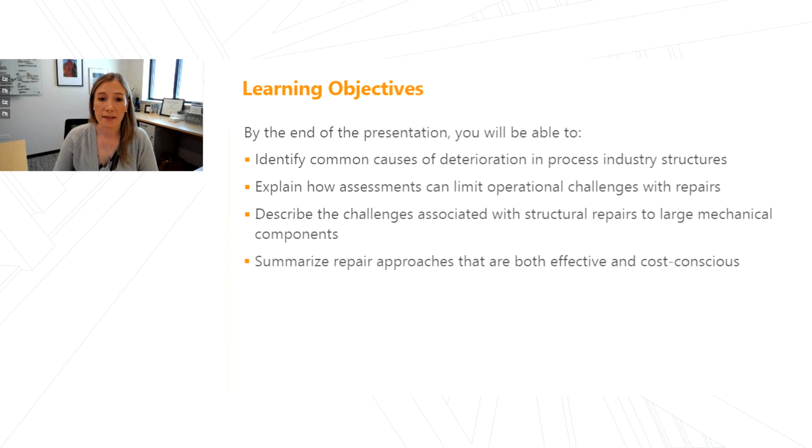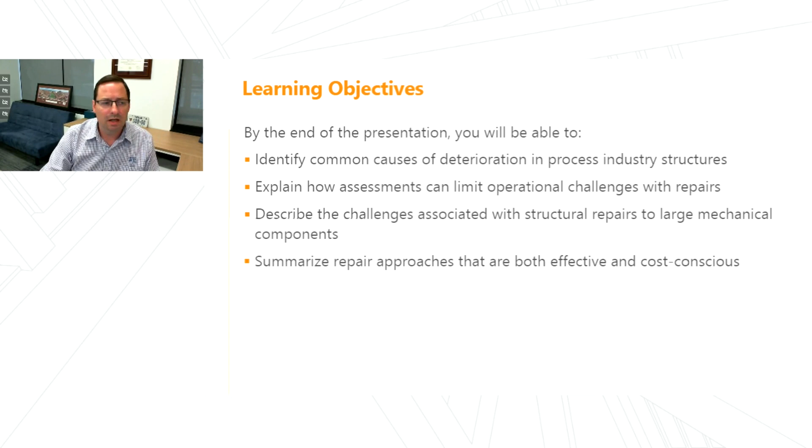Thank you, Liz. Well, let's get started. Our learning objectives today, for those of you in the AIA group, are going to be to identify some of the common causes of deterioration that we see in process industry structures, explain how assessments can limit some of the operational challenges that we see with repairs, describe those challenges associated with those repairs, and then summarize the kind of approaches that we can use to be both effective and cost conscious.

So to do that, we're going to go through a short summary list of the common causes of deterioration that we see in these things, some of the challenges that we see in making these repairs. We've got a couple of case studies that my colleague Katelyn will take us through, and then toward the end we'll discuss some of the proactive and reactive strategies that you might want to employ looking after these structures.

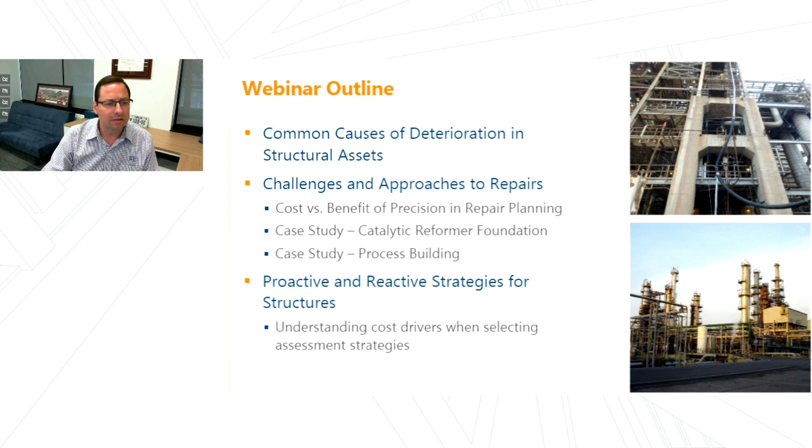So we wanted to start with discussing a term that might be new to some members of our audience. Within WJE, we have several different civil infrastructure initiatives, and the term process industries is a term that we use internally as kind of a catch-all term to describe the refinery, chemical, petrochemical, liquids and gas terminals—really anything whose job is to move fluids around and maybe convert them from one thing to another.

And we recognize that the needs of these industries are somewhat different from, say, the nuclear industry, municipal wastewater, and the like. And so specialists like Katelyn and I tend to focus on these practice areas that are a little more chemical or refining industrial.

But whether that's true of you or not, regardless of where we practice, it's sometimes easy for us to focus on whatever assets are in our task list. I certainly do that, looking at pressure equipment and piping quite a bit more than structures. But that means a lot of us tend to forget about items outside our scope—things you walk past every day.

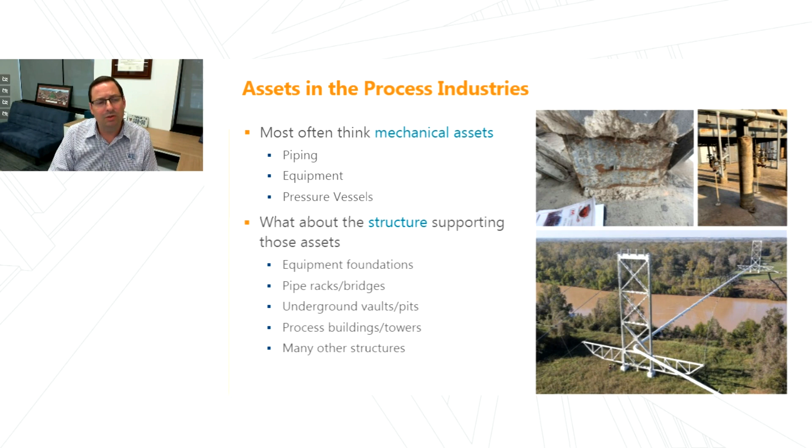And I want to take a moment to remind the entire audience that an industrial facility includes every single constructed item that exists inside the fence. Piping and pressure vessels sure tend to get a lot of attention in my world, but the structures that support those are no less important. And so...

I wanted to talk a little bit more about how the folks in the process industries manage assets. We use different names for this in different regions of the country—different facilities sometimes have different names for everything. But really, we're talking about one basic thought pattern, whether it's mechanical, civil, structural, etc. And that is, we do our best to observe and predict the likely rate of damage or deterioration in some asset, whether that be piping or steel.

We're resetting that damaged state to zero. And in other cases, we may be throwing a coat of paint on, or some sort of resurfacing that provides a new latency period. But really, the logic is the same between pressure vessels, concrete, and steel.

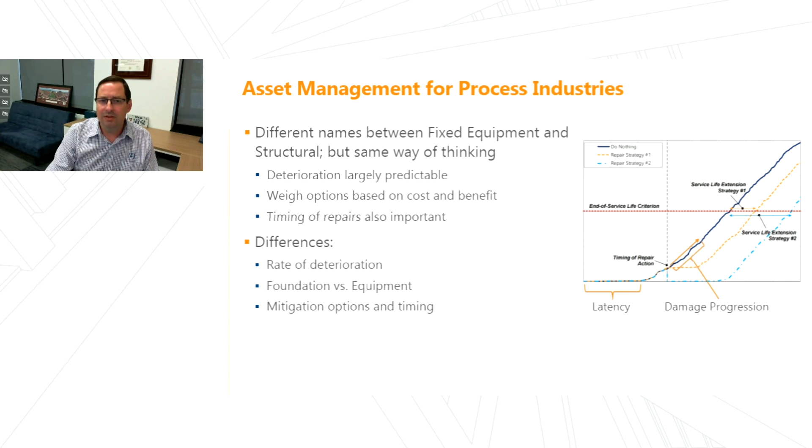However, when talking about repairs in the process industries, it's often difficult to avoid discussing turnarounds. For those not familiar, turnarounds are large-scale maintenance efforts that, in terms of cost, treasure, and time, are kept intentionally short. We see a month as a pretty common duration to get a piece of equipment shut down, cleaned out, inspected, and put back together.

As we've discussed, concrete tends to be a fairly slowly degrading asset. That means it may not need frequent intervention, but it's also pretty slow to get rebuilt if the rebuild becomes necessary. That sets up some competing priorities. Infrastructure takes time to build, and people and process equipment really can't be where there's not a structure that's going to be there to support them.

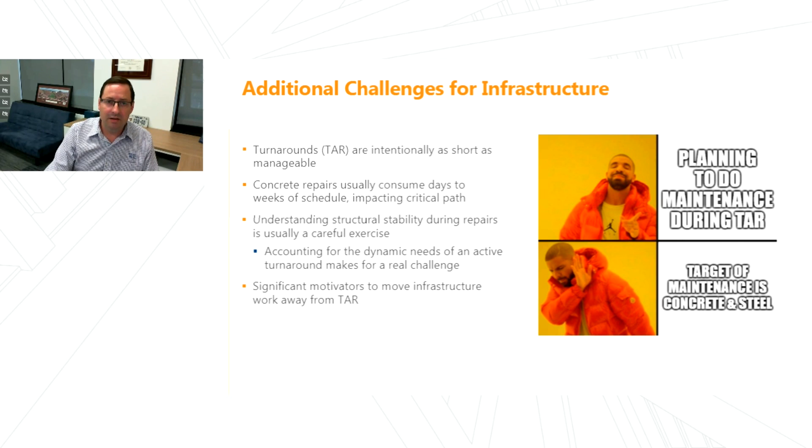So a lot of times putting large structural or concrete rebuilds into these process turnarounds can add a lot of cost and complexity, so much so that we've seen clients delay or even totally cancel jobs just on the basis of the civil infrastructure costs. And so if your asset doesn't make the cut for a turnaround activity, where is that going to leave us?

At the end of World War II, the United States could process around 8 million barrels a day of crude oil, and by the time we reached 1980, our total capacity was 18 million. That came from the post-war expansion, Cold War, and the like.

But we have to remember some of these assets, while they may degrade relatively slowly, have also been in service for quite some time. World War II era facilities, for example, are reaching 80 years old. So we have this interesting feature where you have an asset with a long expected life that has also seen a long life. We need to be cognizant of that as we go forward.

Sometimes updates in loads, or changes in the facility that we need to perform the economic function of the facility, might add load or change the environment for the structure and bring us to a different kind of damage severity state. In the pressurized world, we tend to call that thought process fitness for service. We have a term for that on the civil infrastructure side as well: it's called service life, or service life modeling.

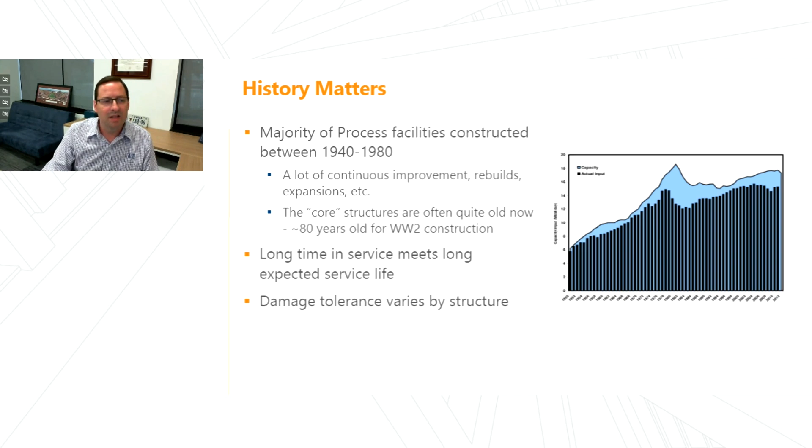On the concrete side specifically, there are a number of material degradation mechanisms that can occur just because concrete is a reacted product, right? We mix a bunch of things together, place them where we need them, and then that reaction progresses. So things like delayed ettringite formation, alkali silica reaction, or carbonation — these are actually chemical processes that take place and degrade the material over time.

And then you have things like freeze-thaw damage and cracking from the thermal expansion of hydration when the concrete is placed. More commonly to structural steel and concrete both, you can have distress that's load induced, things like overload, impact, vibration. These things are really universal to our structures.

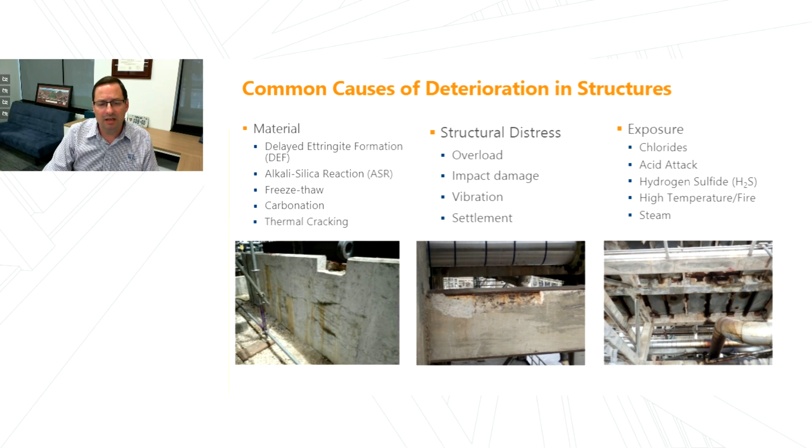And then specific to process industries, we have some exposures. Chlorides are really kind of everywhere in the world, but we've seen some small acid leaks damage the structural steel or the protective coating on steel. H2S can do some interesting things to steel and concrete. And then we have, as we'll see a little bit later, exposure to high temperature, fire, and steam that can sometimes give our infrastructure some challenges.

So when a structure does have deterioration, whether that's noticeable or not — and in this example, I'm using a spalled concrete fireproofing system — a lot of times we can guess what kind of effect that's going to have on our system. In this case, we wouldn't expect the kind of fire rating you might otherwise want, certainly not the fire rating you had in mind when you wanted to put this in place. But it's still holding up the structure and the equipment that it needs to hold up.

And so in this case, the criticality of this is largely tied to an overall risk tolerance within the unit. Now, you might still have hidden damage like corrosion under fireproofing, for example, but in this case, you're expecting the steel to last at least as long as the pressure equipment that it supports.

And beyond that, whether deterioration is nuisance or safety critical is really a question of what the structural engineers call the demand to capacity ratio for any given circumstance. In other words, you need to do some sort of assessment to understand whether a little degradation is severe or might be tolerable for a very long time.

And so for those in our audience that are fixed equipment specialists, structures tend to have quite a bit more redundancy than pressure equipment. And because of that, sometimes the consequence of a failed steel member might be shedding of load from one point to another, where a failed pipe might be immediately noticed.

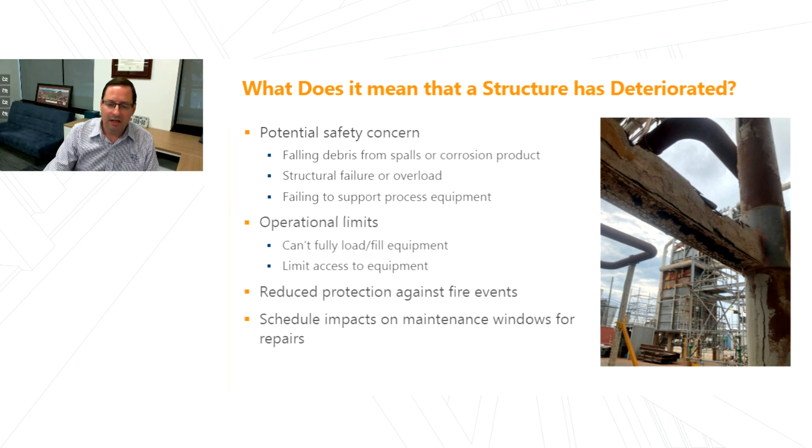So how do you prioritize which assets are going to get your time, your attention, your money when there's such a varying degree of time to degrade, and redundancy in the structure?

Sometimes the best course of action might be an analysis to really hone in on the likelihood of some failure occurring, or maybe get a more accurate understanding of the consequence if that asset will fail. We have a case study of that coming up.

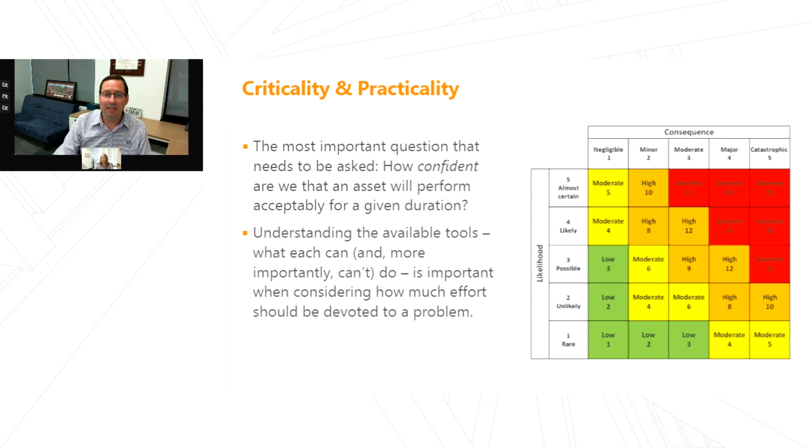To talk a little bit more about some of these particulars, my colleague Katelyn has joined us to demonstrate a couple of assessment techniques and give case studies. Thank you, Kate. Thanks, Scott.

So what does honing in on the likelihood or gaining more understanding of the consequence really entail when we're talking about it from the structural perspective? More often than not, that comes from a better understanding of the structure and what information we need to help you make an informed asset management decision.

It really starts with understanding what are the project goals. You know your assets best, and so understanding the reason for the project initiation and the project goals helps us really guide the direction and the precision of the assessment that's necessary.

Are we talking about long-term maintenance? Are we talking about a post-event assessment? Are we looking to change the use? Is it a newer structure and we see some damage that we're not sure what's going on? What are we trying to understand as part of this project? And what's the likely consequence associated with that?

Then we might need to understand what are the operational and safety concerns. Can this be done outside of a turnaround, or do we only have access to do an assessment during a turnaround? If we think there's potential high consequence of an event based on our discussions with you, there's obviously tremendous value in doing an assessment outside of a turnaround, such that you can incorporate potentially some of the repair work during your upcoming turnaround.

We also need to understand what are the loads that we're talking about. What's the magnitude of loads on this type of structure? What's the equipment? Will it stay in operation? How frequently is it in operation? If we're talking about live loads from the access, how often are people accessing in and around the structure? And all of those questions will really feed into what type of assessment is necessary. Is a visual assessment going to give us the information that we can make an informed decision for you?

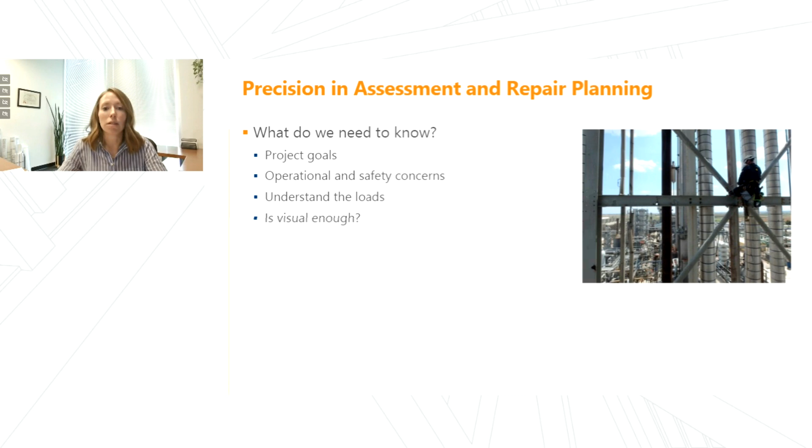So really then we need to ask ourselves, what's the question that we need to answer? Is the question, is it safe now? Is it, how do we fix it temporarily, or how do we fix it long term? If we're going to fix it, or if we're not going to fix it, how long is it going to last? And then maybe it's, how can we prevent this in the future? We see a systemic issue, or we've had this come up in a few different situations, so how can we prevent this from happening further down the line?

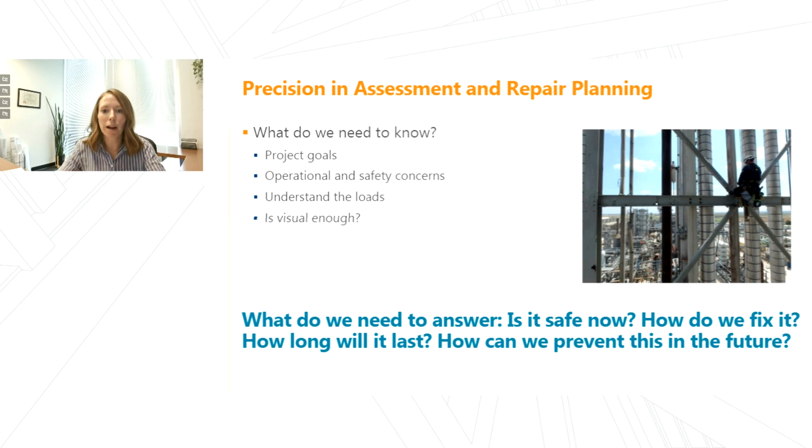The answer to the question might require just a simple evaluation, or it may require an in-depth understanding of the structure in order to answer. So to understand what's going on, we might need to know certain things about the structure that we can't really ascertain from a visual inspection alone. Some examples of this might be, we don't have any existing drawings, so we need to know the as-built configuration or the geometry, or maybe we need to have a better understanding of the steel or the concrete strength.

Scott mentioned earlier some of the common causes of distress in steel structures, and some of those require in-depth investigation to truly understand. Examples would be how pervasive corrosion in reinforced concrete might be, what's causing the distress if it's not readily apparent, and how far material degradation extends. We may also need to perform a detailed analysis utilizing the results of some of these in-depth assessments to determine what truly is the effect of the degradation on the structural capacity.

So with the goals in mind of what are we trying to determine and what's the consequence of an event, we can really help you fine-tune what's the investigation level necessary to get the right level of confidence required for the job. We can work with you to inform you on what is the value that you get as part of this additional assessment, and then how it can be used in your asset management program.

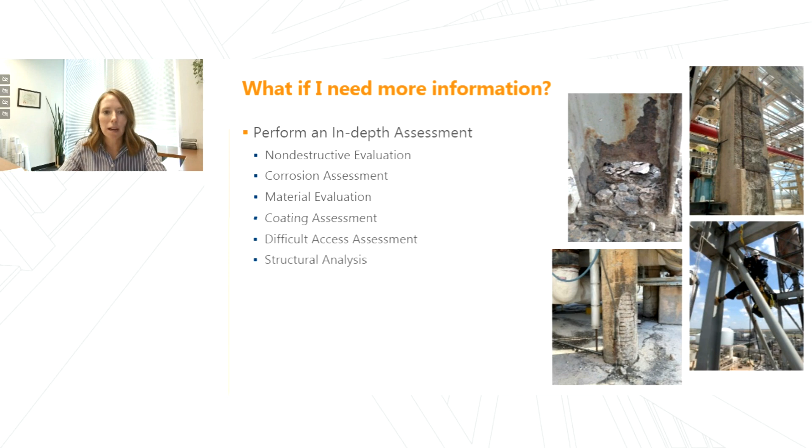The first is non-destructive evaluation. You may need to get some information about the structure that you don't have available. In order to properly analyze the structure, we need to understand the as-built configuration, and we might not have existing drawings, or we have existing drawings of the structure, but that's not really what's out there right now -- we've had some additions, some repairs, some modifications. So we might need to go out there and do some non-destructive evaluation to get the information that we need, such as reinforcing bar size, spacing, and cover depths.

We might also, maybe in newer construction, be aware of some internal defects in reinforced concrete, and we don't really know the extent of them or the potential effect that they have on the structural capacity. So we might need to utilize something like non-destructive evaluation to understand the extent of voids, distress, or cracks.

When I say non-destructive evaluation, I'm sure you're all familiar with it as it relates to steel and equipment assessments, but they can be really useful when we talk about concrete structures. The slide here shows a few of the ones that we typically utilize, but there's a whole slew of different non-destructive evaluation techniques that can really tell us a lot of information, often while a structure is still in operation, to give us the level of confidence that we might need in order to develop a repair consistent with the goals of the project.

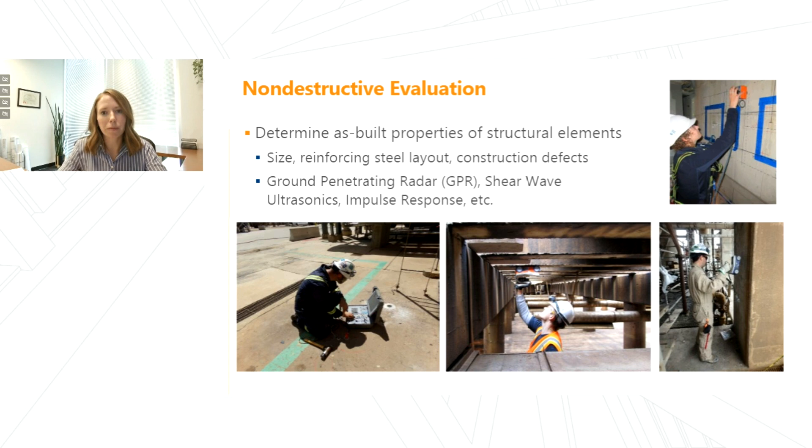We may also have a known exposure or evidence of severe corrosion, but we might not know how pervasive the issue is. In steel structures, it's generally easy to quantify and visually assess the extent of section loss, but in reinforced concrete, it might not be so obvious. As Scott mentioned earlier, deterioration may take years to manifest, and so we might need to utilize something like half-cell potential or corrosion rate measurements to get a true understanding of the extent of distress in a reinforced concrete element.

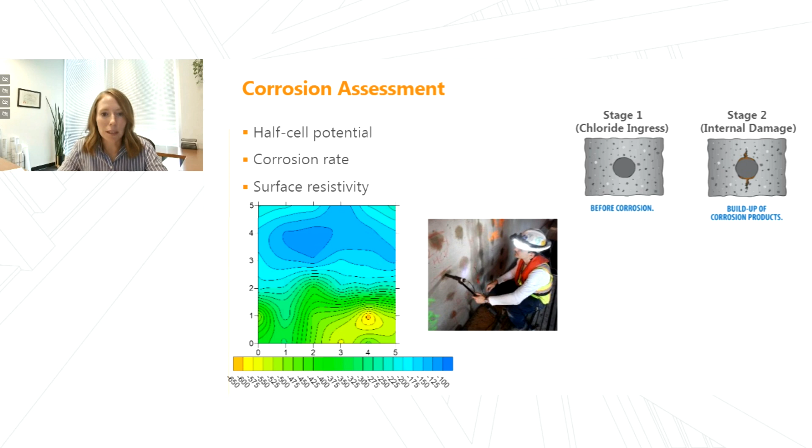The best example of this that I can give you when we're talking about reinforced concrete is chlorides. Like Scott mentioned, chlorides are everywhere, so this is a pretty common issue. When we talk about chloride ingress, we have a reinforced concrete element, we have a chloride exposure, and as those chlorides migrate to the level of the reinforcing steel, we get depassivation of the reinforcing steel, which provides a buildup of corrosion product, and that induces tensile stresses in the concrete, and it causes cracks. As we get additional buildup of corrosion product, the cracks continue and propagate to the surface of the concrete.

And that's where this stage 3 level is, when you start to see cracks that have some of that rust staining on the surface. That's what we're seeing there around the stage 3. And then as that continues to advance, you get this stage 3 plus, where we'll say advanced damage. So here's where you have those larger spalls, you have exposed bar, you're starting to get severe section loss. And so the value of a corrosion assessment might not really be all that helpful when you're already at stage 3++, because you have some exposed reinforcing, you can really determine the section loss.

But it's really useful when we maybe have an asset and we have distress in a few columns, but we see somewhere around stage 2 to stage 3 at the adjacent columns. So this type of assessment can really give us a better understanding of holistically what's happening to the structure. And maybe we need to implement some early maintenance on the stage 2, stage 3 columns so that they don't get to the level of stage 3++, where we have a concern on the structural adequacy of the structure.

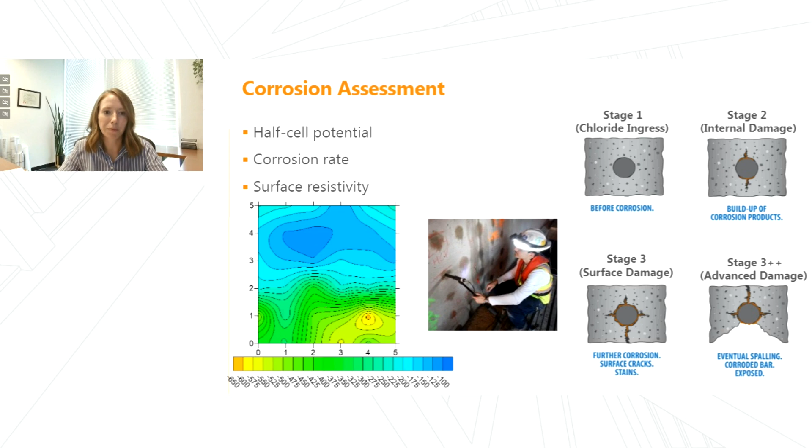Another example is material evaluation. So you may know you have a material degradation exposure, but you don't really know what the extent of your damage is. As shown in the previous slide, where along the chloride profile you are in your concrete can tell you a lot about the potential damage. So if you take some concrete cores, you do a chloride assessment, your concrete cover is 2 inches and you only have chlorides at 1 inch, okay, well that tells you we don't really have a concern in certain elements. If it tells you, hey, no, we're at the level of the reinforcing, well then that maybe can be part of your preventative maintenance plan.

I should mention it takes a long time to get from stage 1 to stage 2 in that figure that I previously showed, but the damage mechanism once you reach stage 2 to stage 3++ is exponential. So anything that you can do to prevent yourself from getting to that stage 2 is really helpful in terms of preventing significant distress that you might have.

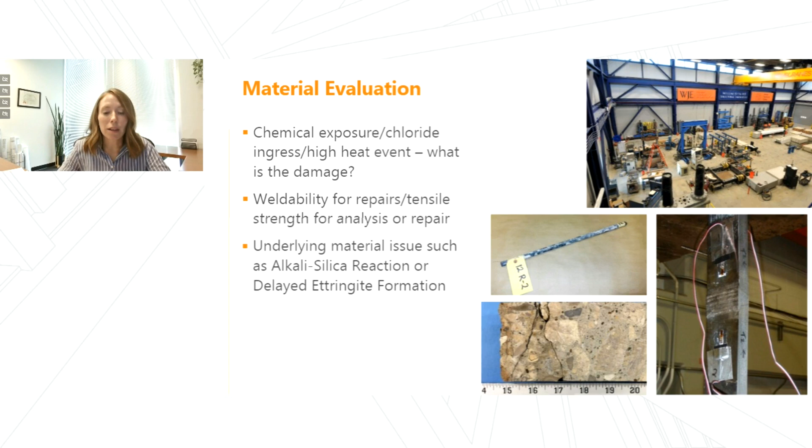And then it might come down to doing a more advanced structural analysis to determine if the structure is safe in its deteriorated condition, or if it is safe, can the equipment continue to operate within its normal operation constraints? Oftentimes, we can answer the first one, is it safe now? And then our clients say, okay, it's safe now, but how much reserve do we have in order to help plan when the likelihood of a consequential event might occur?

And we can shift the priority if we have several structures that we're looking at. A detailed finite element analysis or a 3D model can really help us hone in on what is our capacity accounting for that distress. It might also help us stage repairs such that they can occur outside of a turnaround when the structure is still being accessed, or say when the equipment is still in operation.

We can model the equipment along with the structure to understand how that load transfer happens when we start to do repairs. And maybe we're doing concrete repairs and we're starting to demo and remove some of that bearing area. What's going to happen to the structures such that we can continue to operate the equipment? So advanced structural analysis can really provide the necessary level of detail in order to reduce the likelihood to an acceptable level.

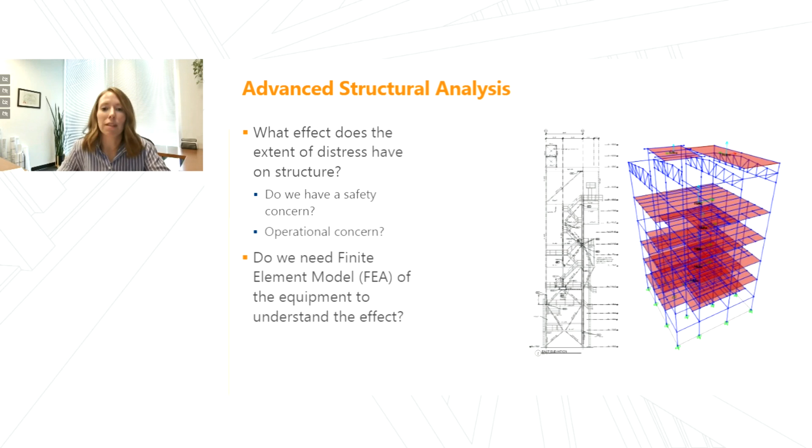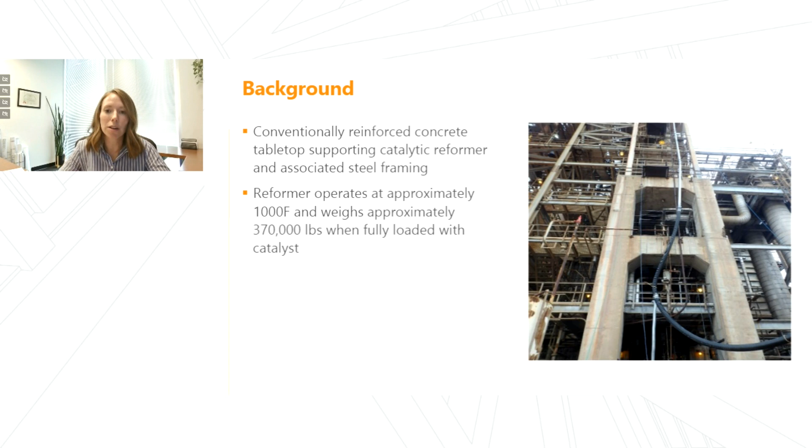The tabletop and the upper deck are 26 by 16 feet, and it's a little over 4 feet thick, supported by 4 concrete columns on a mat foundation. Now, the reformer, I'm sure you're all aware, operates at a high temperature, approximately 1,000 degrees Fahrenheit, and it offers a significant load to the structure of 370,000 pounds when it's fully loaded with catalyst. So this is a substantive load at a high temperature on a reinforced concrete element.

The refinery personnel were aware of some deterioration, as you can see here in the photos. The red arrows point to some spalls, some large cracks that we saw. And this really elevated the structure's risk profile. But the real increase started when a large concrete spall fell to the valve deck below the reformer. WJE was then retained to help plan and support the repairs.

Based on the assessment, we determined the distress was really caused by a combination of chloride-induced corrosion and the high heat exposure from the occasional process leaks and steam stuffing of the catalytic reformer. We worked with the contractor to develop a repair to supplement the damaged reinforcing and provide cathodic protection to limit the extent of future distress and to help restore the cross-section.

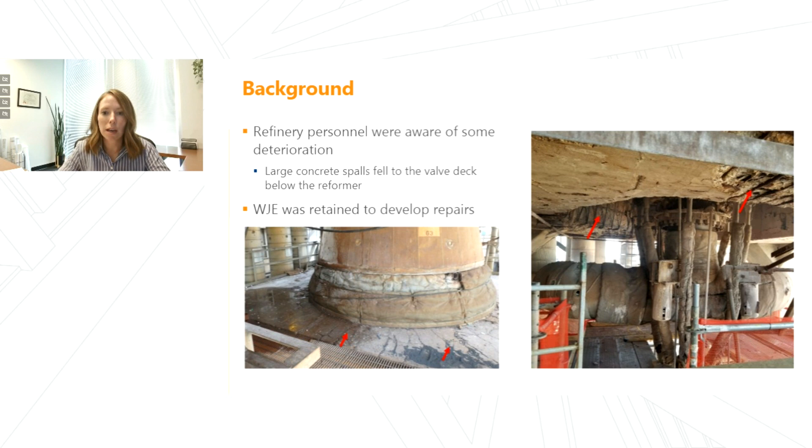During the course of construction, the demolition was executed beyond what was originally planned. As you can see in the photo on the left, we see daylight beneath the reformer's base plate. This condition fundamentally altered the load transfer from the reformer to the structure, and it really raised a question of whether the structure remains stable for the continued turnaround work.

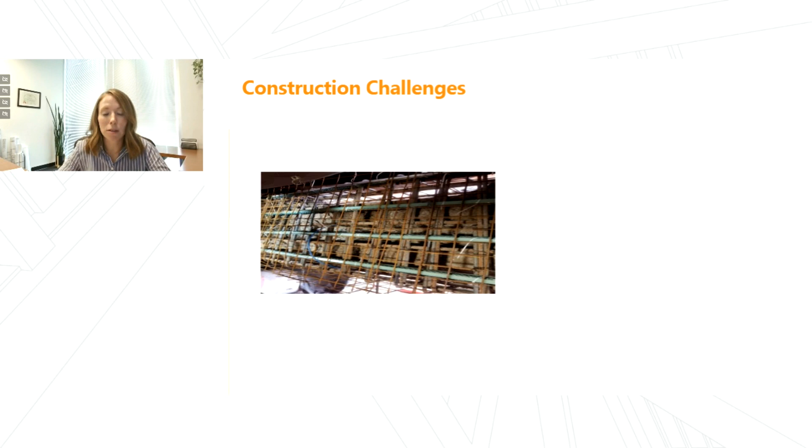At the same time, the site reported that they had contractors inside the reformer doing repair work. Again, this was occurring during a turnaround. If that structure had collapsed, the resulting loss of life and property would have been enormous. So when we're talking about the risk matrix, this would have been a major or catastrophic consequence with an unknown likelihood of collapse, and we'll call it possible. That was pretty tough to tolerate.

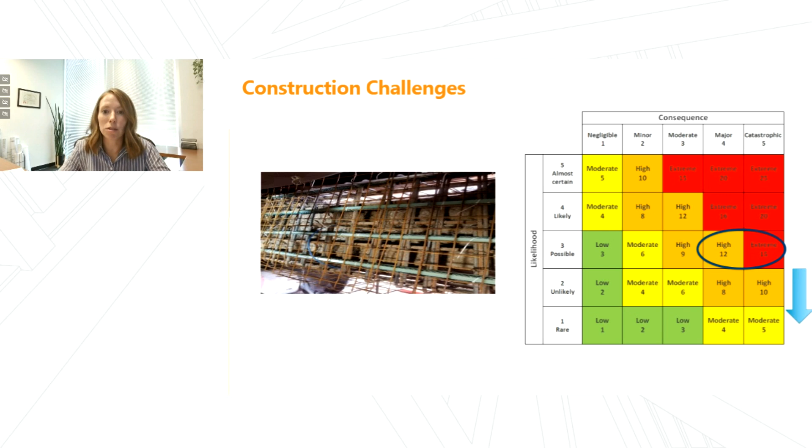And so the client asked us, hey, can we better refine the likelihood of a collapse with some advanced analysis and get this down to a lower likelihood? So how do we do that? How do we refine our understanding of the likelihood? Well, through a better understanding of the structure, right? What is the remaining capacity and bearing area accounting for that additional demolition depth?

And what's the required demand on the structure associated with that? Since all this was occurring during a turnaround, our structural engineers reached out to our mechanical engineering team, and they developed a FEA model of the vessel. This model was then used to ensure both the mechanical integrity and stability of the reformer during the repair, but it also was used to better understand how the loads would transfer back through the structure. And then on the structural side, we could evaluate that to determine if the remaining area was sufficient.

Based on this model, we actually modified the repair sequence to occur in 2 phases so that the work could continue not just in the concrete demolition and repair, but also in the reformer simultaneously. Our materials lab also worked with the contractor to optimize a mix design with these new constraints, and the project was able to continue on as planned.

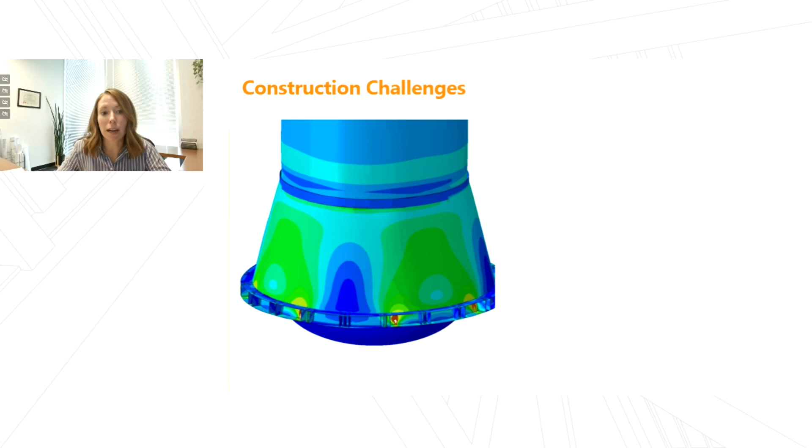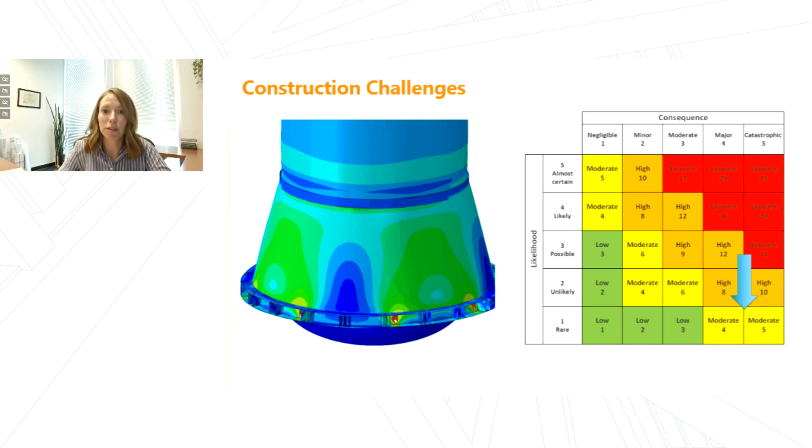Was the likelihood of collapse that high as initially feared at the onset? Maybe not, but it's really only through careful engineering that we could say with confidence that the likelihood of collapse was rare for these conditions that we were dealing with. So our multidisciplinary analysis permitted the ongoing maintenance and repair of the reformer during the foundation work. The repair was completed during the turnaround.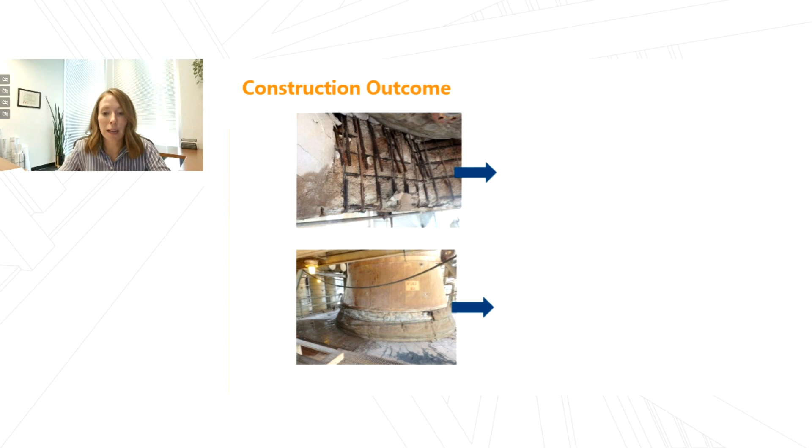Our client went from known hazards of falling debris through a repair that took some unexpected turns and to a finished rehabilitation project with decades of expected future life, all occurring within the original planned schedule of the turnaround.

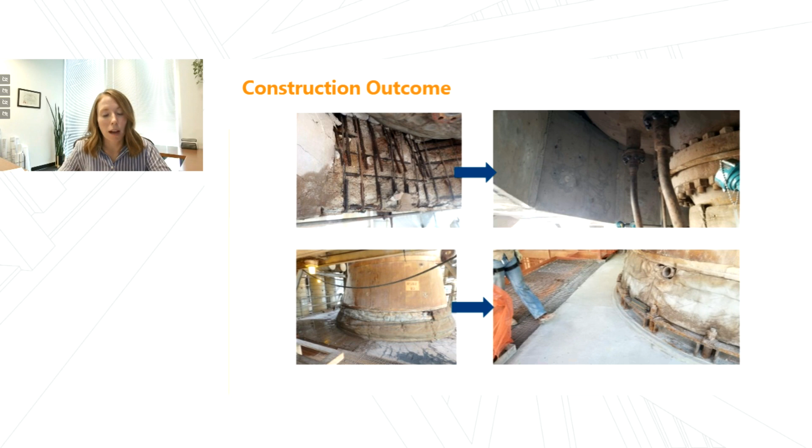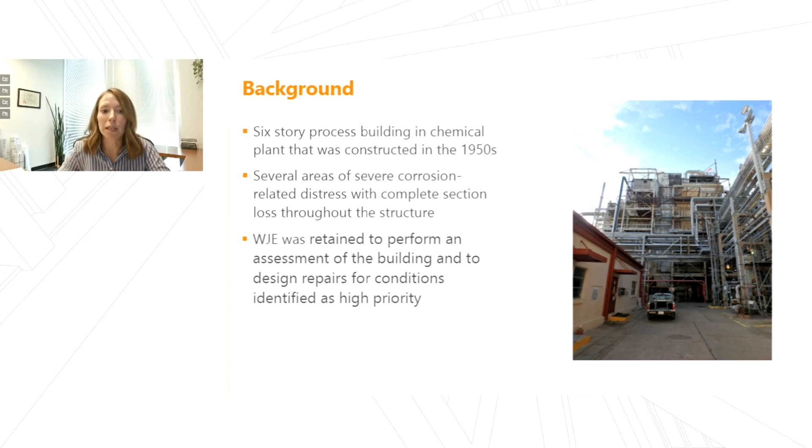Another example of this is a process building. It was a 6-story process building in a chemical plant that was constructed in the 1950s. The owner had engaged another engineering firm to do an assessment on the building, and they identified approximately 300 pages of distress. WJE was then engaged through a contractor to perform an assessment of the building and really work with the owner to develop a prioritized set of repair documents to determine what the tolerance level for conditions would be considered severe risk so that they could implement repairs to those.

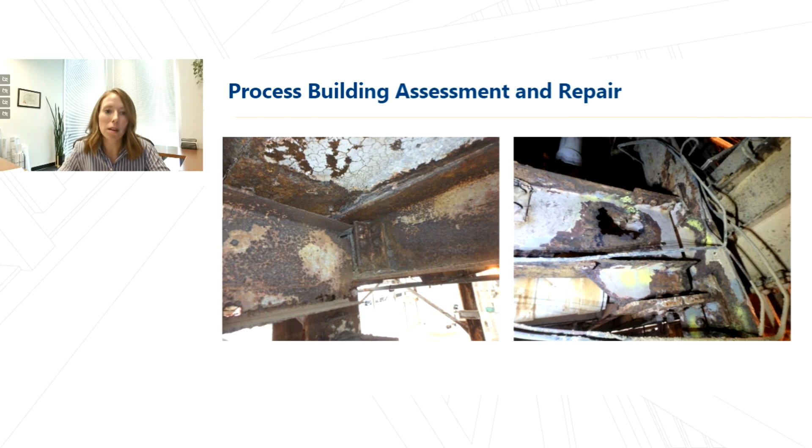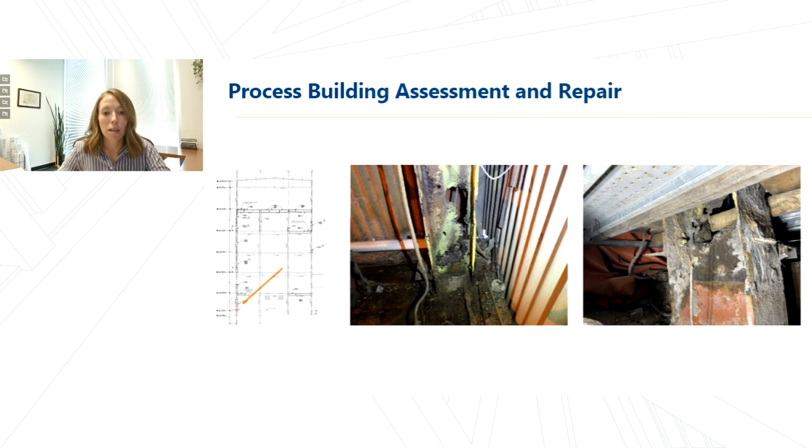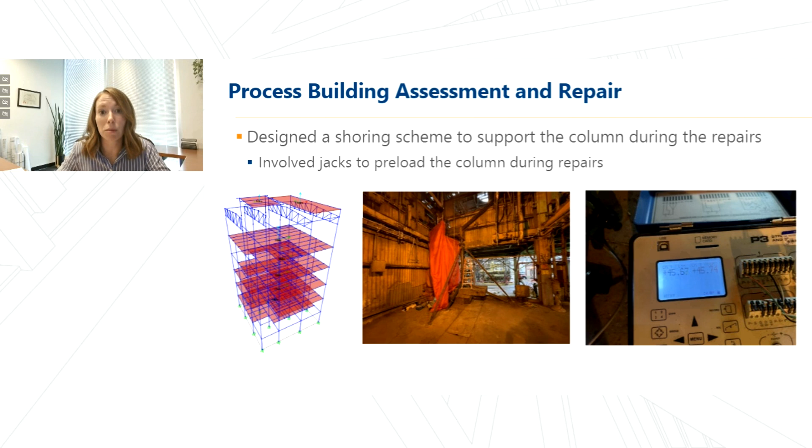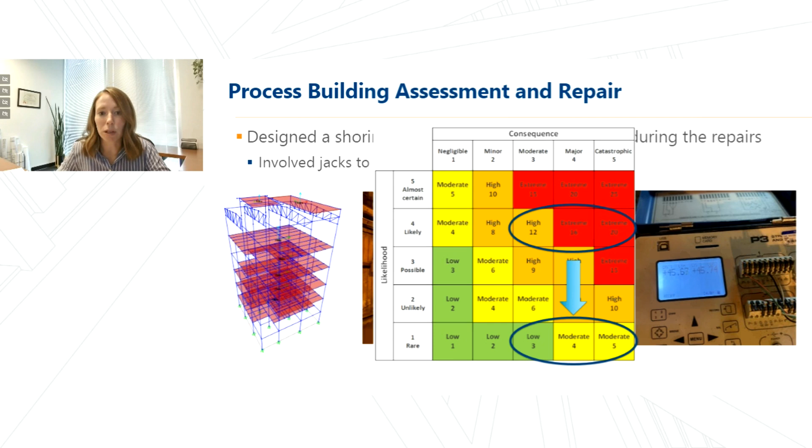And then we instrumented the shoring system. So we were able to monitor that jacking force with load cells and a data acquisition system shown there on the right. And by monitoring the shoring system, we were able to have a high level of confidence that the shoring system could carry the intended loads upon removal of this section of column. So we were really able to bring down the likelihood of an event to something that was a lot less likely to occur during the course of the implementation of this repair.

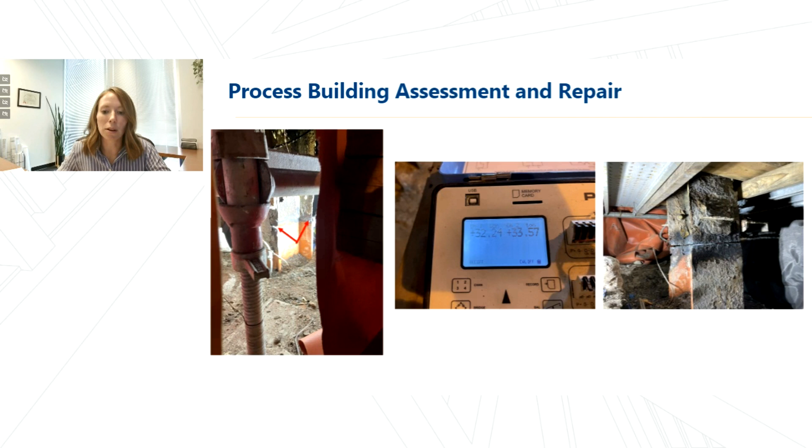that we had determined the column was carrying. The contractor then proceeded to completely cut through the column at the base and at the top, removed the corroded section, primed the two sections that were going to remain, and successfully installed the new column section. They then brought the jacks down and removed the shoring to put the load back into this column. So that's an example of the existing condition and the repair implementation, all while the building was still in operation.

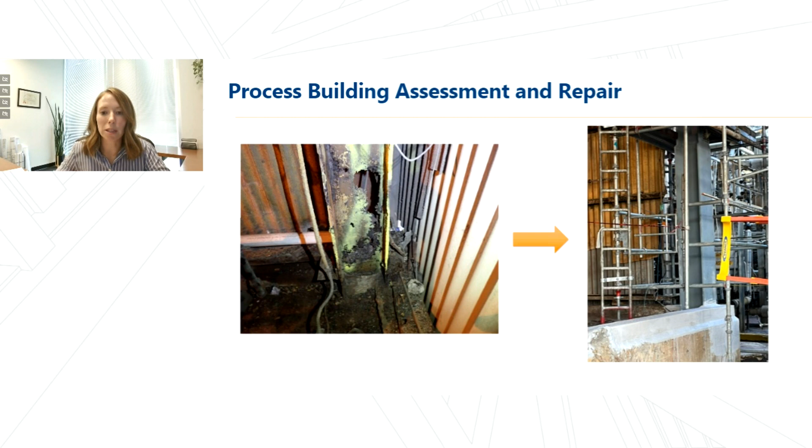We wanted to close out this webinar with a summary of the value of proactive strategies. Several of the structural damage mechanisms could be caught earlier in the life cycle with some proactive strategies. We understand there's not currently a comprehensive inspection program from API for structural infrastructure in the process industry. API sets standards for equipment, but they don't really set standards for the underlying infrastructure. Other industries like bridges, ports, and nuclear have a comprehensive inspection program that includes the infrastructure, and these elements are typically visually evaluated every 5 years, sometimes more frequently, depending on deterioration and exposure conditions. I know some of you have your own structural inspection program internally, but there's not a comprehensive guide for the industry.

And I know when I say we think you should look at implementing a proactive assessment strategy, in your mind you're saying we already have enough to deal with in maintaining our equipment. We know that's our primary focus when we're trying to keep this plant operational. But what we really want to show you is the value of doing proactive assessments: one, it can help you perform them outside of a turnaround, and two, catch routine maintenance issues that, if left unaddressed, could lead to a high consequence of failure and become significantly more expensive to repair.

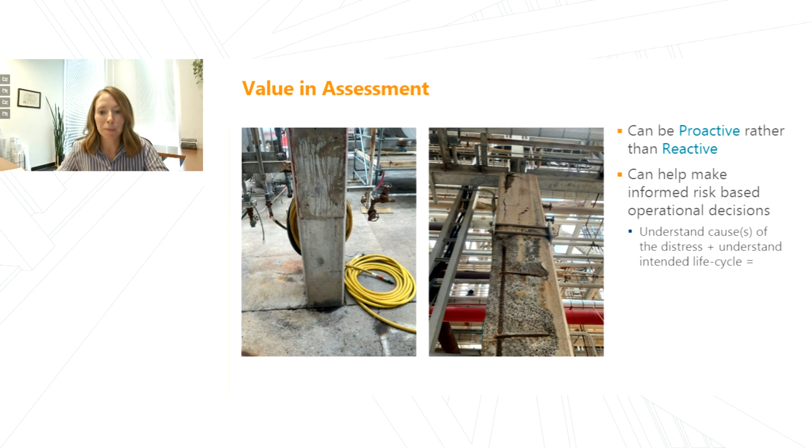So it can help you understand what's the distress, what's the extent, but then you also take into consideration: what's the consequence? Is it redundant? Then I'm less concerned. Is there a high consequence? Then maybe I need to look at this more frequently, or the time's come to implement a repair, because we want to get another 20 years out of this. So it can really help you make informed, optimized asset management decisions.

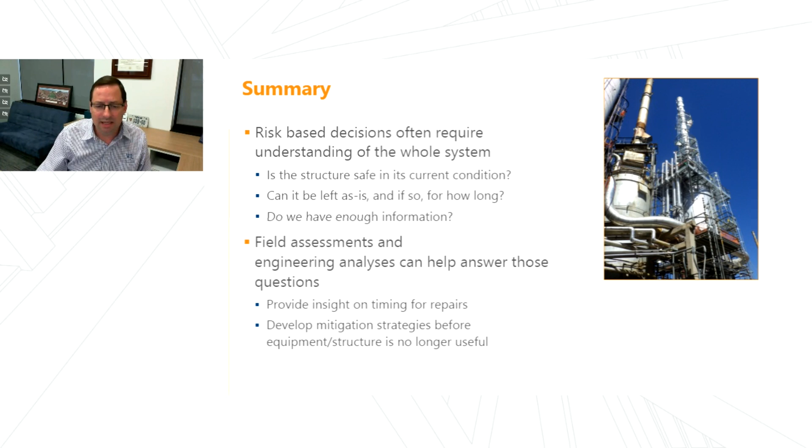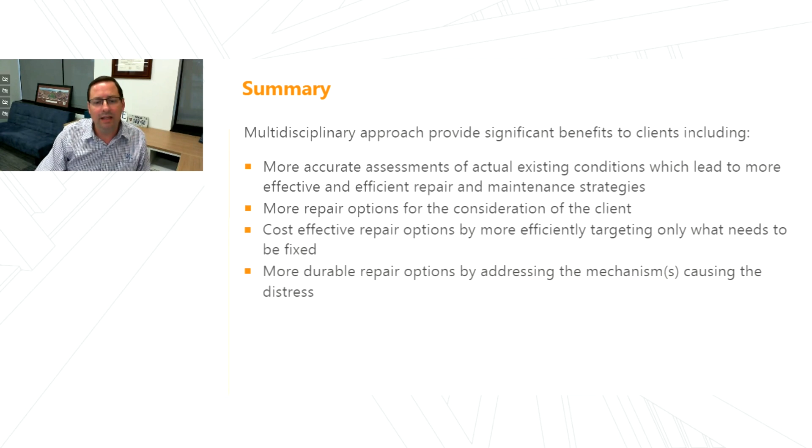So for those of you responsible for facilities, if you're not already doing deliberate field walkdowns and field assessments of your structures, they're not difficult. You can do them yourself if you have the staff. When something looks a little amiss, the tools are available to gain a deeper understanding of the structure. When structures are holding something big or high consequence, it pays to understand more about the interaction between the structure and the equipment, so that some feature that looks benign, or some activity you didn't think was threatening, doesn't surprise you down the road.

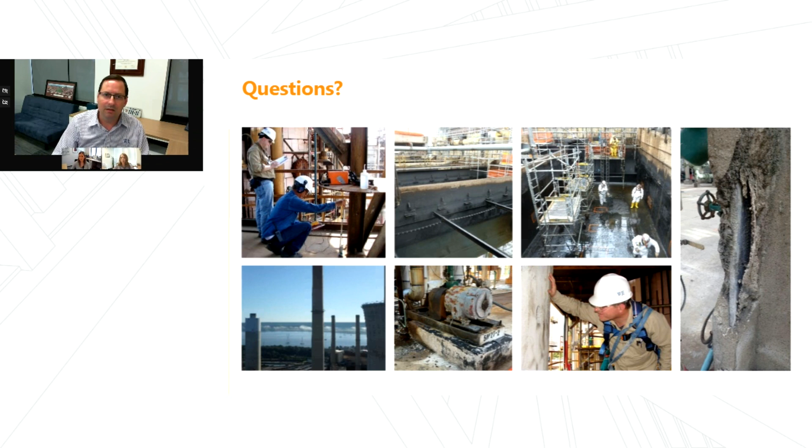Is there a simple way to determine if concrete around steel columns is for structural purposes or just fire protection?

Yeah, so I can take that one. I would say it depends. It might be easy to tell depending on the thickness of the concrete around the element, but it might also take a better understanding of what the loads are on that structure, and if we actually need to account for the concrete confinement in order to make the structure calc out. So it kind of depends on what we see when we're out there, and if we think there might be higher loads on a structure and we might need that composite behavior. Otherwise, it might require an analysis to determine.

Can you please explain more what is half-cell potential regarding the concrete deterioration assessment? Yeah, so a half-cell potential will really tell you the hot spots where you have the potential for corrosion of your reinforcing bar. It's really helpful if you have known moisture sources, and maybe the bottom of your equipment or the bottom of a wall column might be more prone to moisture ingress. You can use half cell to understand where we have hot spots on this structure, and that might help bound the extent of our repair.

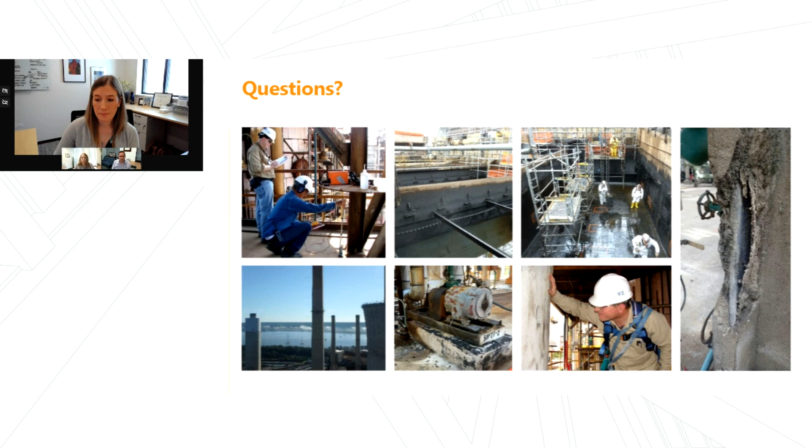Yeah, so when we talk about life cycle, it's kind of understanding both the mechanical side of it and the structural side, so looking at it more holistically. One, how much longer do we need the structure to remain intact, and in what shape does it need to be in for the end of the service life? And also, do we have enough information about the structure to know whether or not it will last that long?

So if we're talking about reinforced concrete, knowing a lot about the constituents and the material properties of the concrete itself can help us understand what the service life is. Then we can use that in combination with the anticipated life cycle to know, okay, will it last this long? If not, what would we need to do as part of routine maintenance in order to get it to last the life we are trying to achieve?